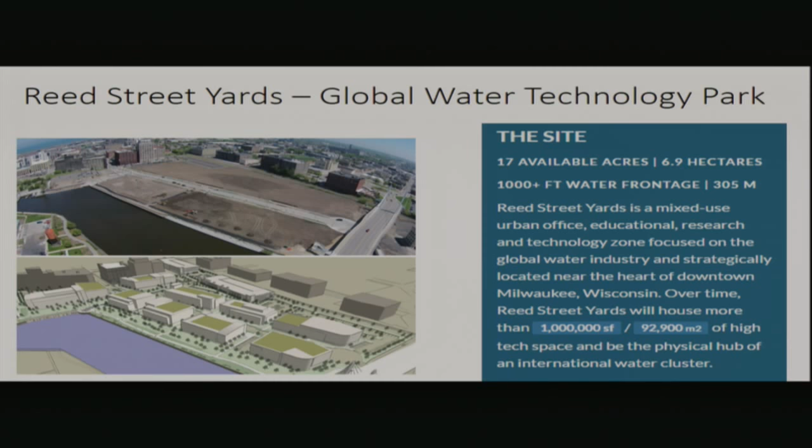Right now, there's Watertronics, which is a startup. They capture water from the canal, they treat it, and they return it back to the river. There's also Zurn, which is a branch of Rexnord. They have a facility there solely dedicated to training their engineers.

So it's very nice for Milwaukee to have all of that right here, right? According to the Water Council, we have about 180 water-related companies in Greater Milwaukee. When people talk about water technology, several things may come to their minds, right? And the Water Council defines water technology as solutions that address water quality and quantity for water users.

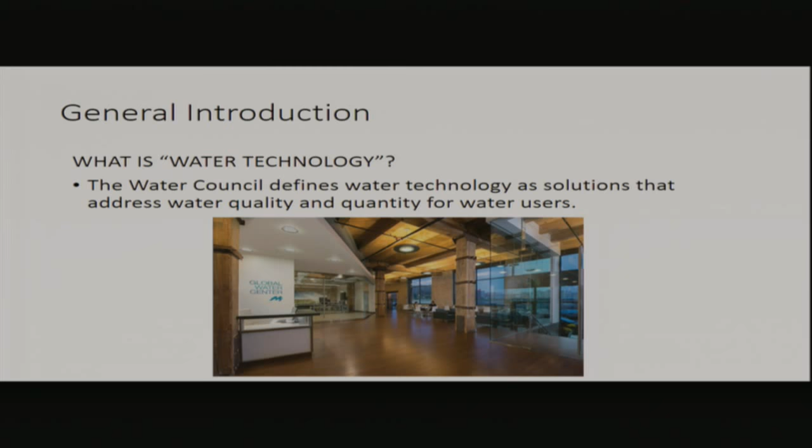Let me tell you a little bit about our facility, the WaTA facility. By the way, it is a shared facility, so it is available to all the schools and departments at the university. So it is available to you. We do have a clean room. It's specifically for microfabrication and for fabrication of certain steps of filtration materials.

It's ISO class 6, so it's an environment that has a limited number of particles per area, right? Researchers wear special garments when working in that room. That's mostly for microfabrication. The microscope room is also available to all the students and faculty in our university, and to our partners as well. So other universities, industry members, this is all available to them as well.

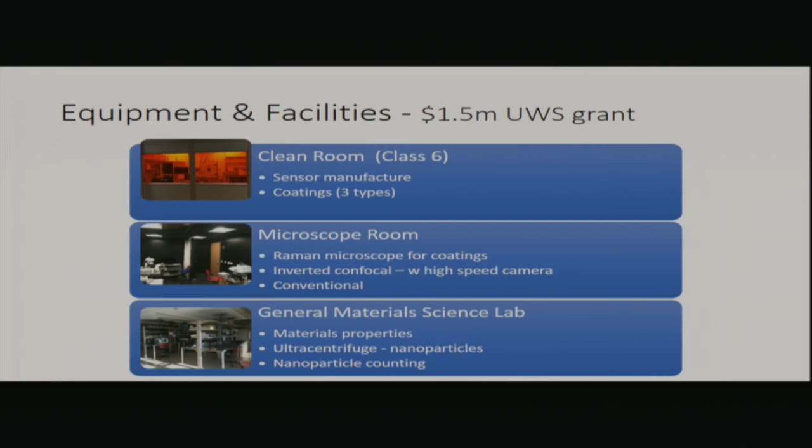In the microscope room, we focus on disinfection technologies. We have a confocal scanning microscope, an upright microscope, and a Raman microscope. And we also have a general material sciences lab with a variety of equipment for evaluation of material properties of our sensors and adsorbents.

We make sure that we can collaborate with all the departments and resources that we have available at the university. We collaborate with the Office of Undergraduate Research, School of Freshwater Sciences, Physics, Shimadzu Center, and also AAF, and Steve is right there. We collaborate a lot with his facility. So that's the beauty of this, really joining efforts and collaborating and bringing things together.

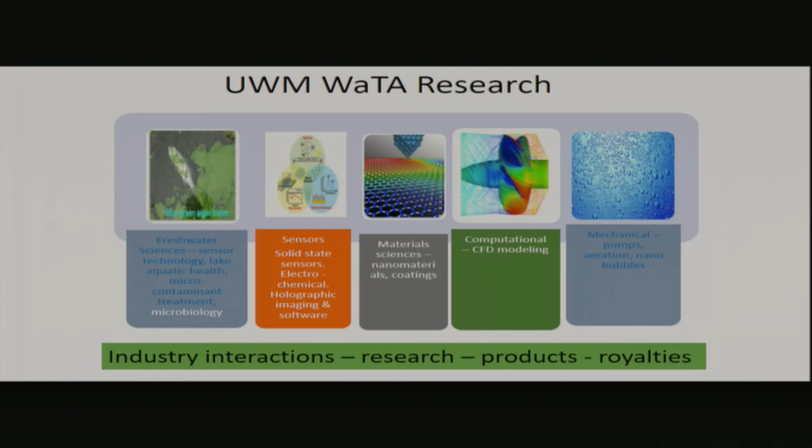I want to tell you a little bit about what my lab is doing right now. My research is mostly focused on development of novel porous materials. Here are some of the students that I have assigned to those projects. I'm also working on a bacteria detector sensor, a sensor for detection of biofilm in pipes, also evaluation of a device for detection of dissolved metals in water, and microbial fuel cells.

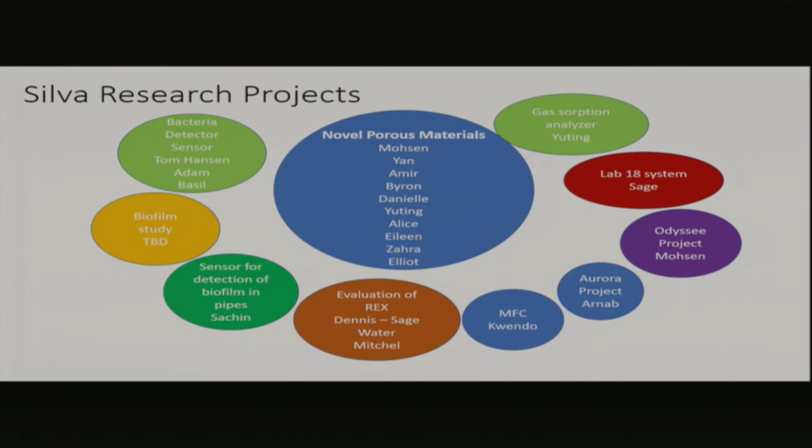I have a project in collaboration with a local hospital in the medical field, and the Odyssee project, which is a French startup, and we are helping them evaluate the ability of their materials to reduce corrosion. I also have specific work in development of techniques for metal oxide deposition, and also for evaluation of micropores, mesopores and macropores in adsorbents. So this is what I'm doing right now.

So every time we are conceiving ideas and developing novel technologies, we think about protection of that IP, which belongs to the university. So some of the work that I will be showing here to you, you may find a little shallow, but that was on purpose. Most of our research is actually being considered by the UWM Research Foundation for patent. So we are not allowed to release information. It is considered public disclosure if we do so.

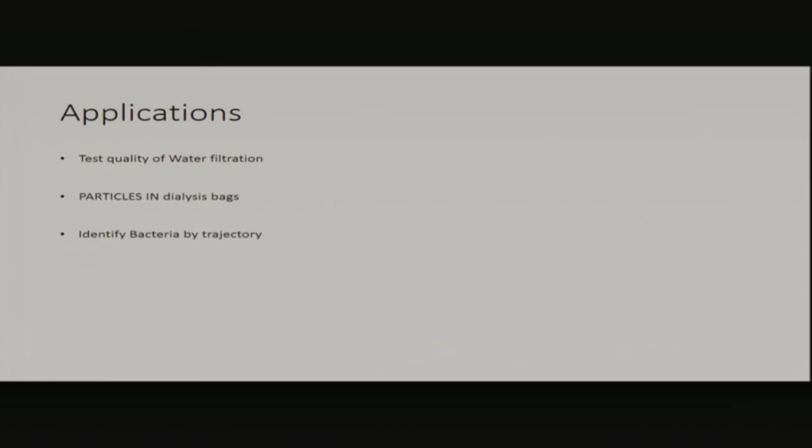Initially, this sensor is for detection of particles, so visualization and quantification of particles, and also for detection of bacteria. So we have some progress in that field. There's still a lot to be done. I will show you some of our progress today.

As a sensor for detection of particles, one of the applications we see is evaluation of quality of dialysis bags. When talking to my collaborators at the Medical College of Wisconsin, what I learned from them is in these applications, they don't care about how much is there. They care about, is there anything there? So it's a yes-no test. If yes, they cannot use the dialysis bag. If no, then of course they can go ahead and use it safely.

So this sensor is an optical sensor. We use what is called holography. There's a tiny volume, I believe we are working with 2 microliters right now, where the images are acquired in layers. The number of layers and their thickness are determined, and we acquire images in 2D, but because they are acquired in multiple layers, they give us 3D information about the number of particles in that field of volume.

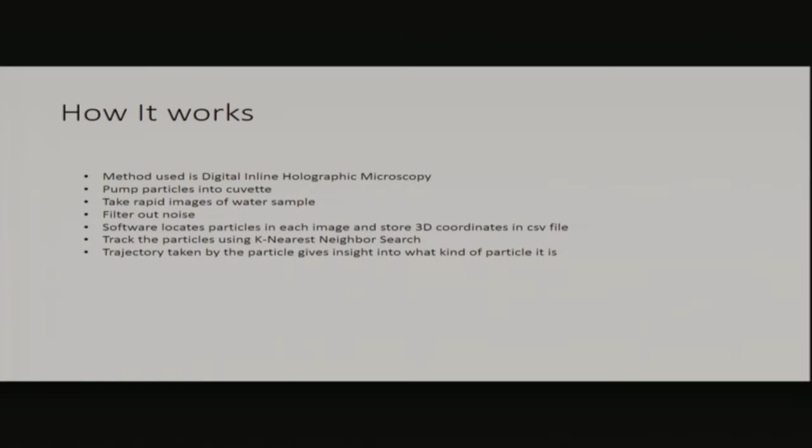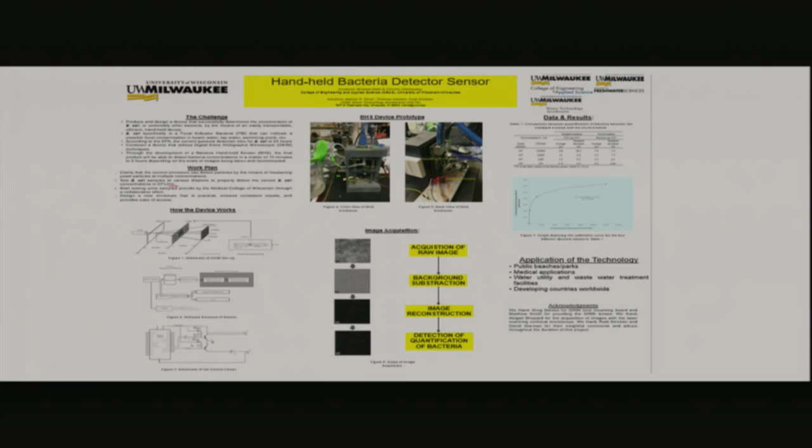In this particular case that the students presented in this poster, they spiked pure water with a known amount of bacteria of a single strain. So in that case, we were able to quantify bacteria under these conditions. Here is one of the images we acquired when we were partnering with a startup called Stonehouse. We had our device integrated with their filtration system.

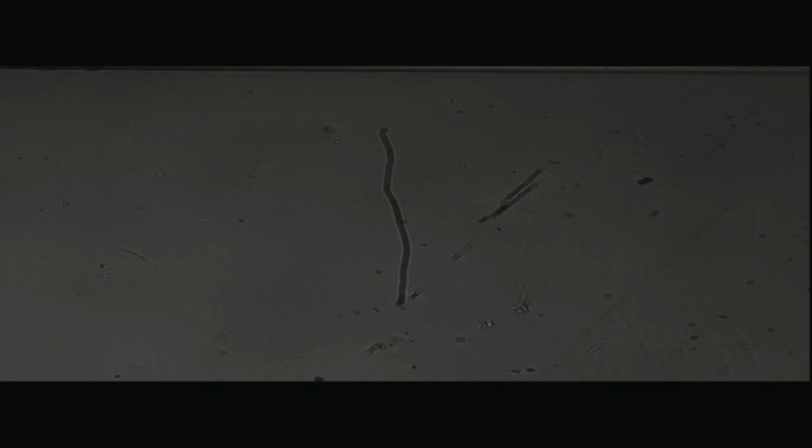I know this image is dark on purpose because that's how we see it when we acquire the images. We extract the noise, and then what remains are just these white dots. Then we have particle tracking software where we can identify the particles and quantify them. I will go with it again so you'll see where they are and how they were identified. This is just to touch base on some of the technology that's out there.

Another one, and this one in particular, we are working on patenting this idea. So for this one, I'll tell you the purpose and show you a little bit of what we know so far, but we don't release information about the technology. So right now, a sensor for detection of biofilm in pipes. Let me just bring everyone together in terms of what biofilm is.

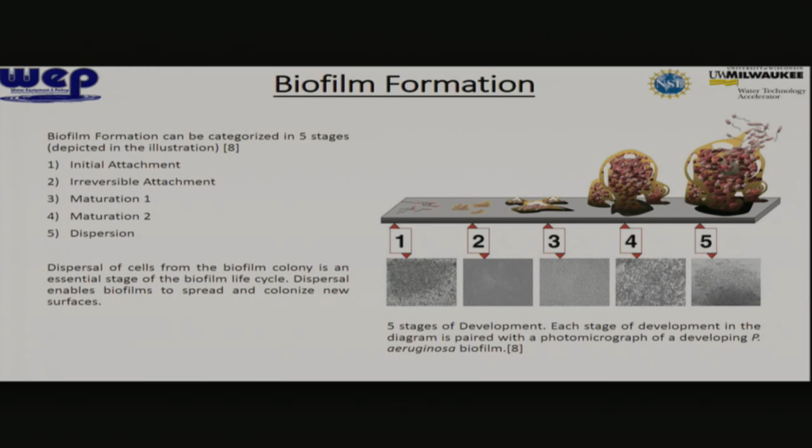So we have a colony of bacteria, and they live in colonization. We have the formation of biofilm. This is a well-known theory. In the initial phase, there's a reversible attachment until it finally reaches irreversible attachment, maturation, and then dispersion, when the biofilm starts to come off. So, why do we care about this? Well, biofilm is well known in all sorts of medicine applications.

Not only the room where the patient is located, right, and the need for reducing the presence of biofilm. And yes, I'm talking about reducing because biofilm will grow on all sorts of surfaces, in all sorts of temperatures and conditions. They may grow less or more, but they will certainly grow, and that is a concern in the medical field.

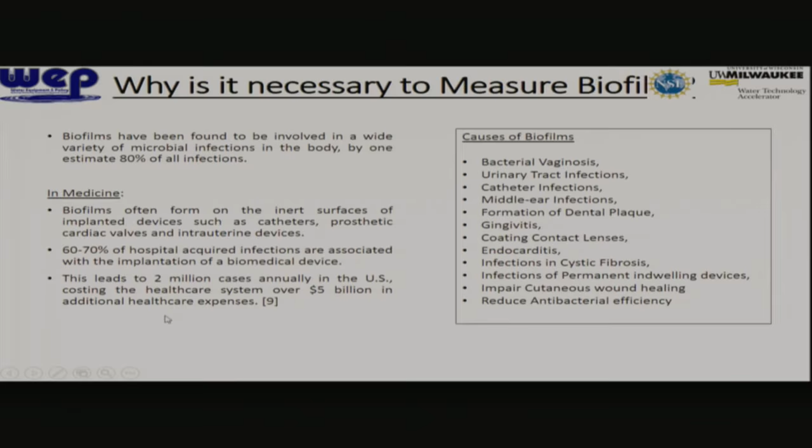For odontology, right, for the bacteria, the biofilm that grows on teeth, or contact lenses, which I actually wear, and that's always a concern for the users, right? So these are just a few of the reasons why we care about biofilm in the medical field. And of course, this leads to 2 million cases annually in the US, costing the healthcare system over $5 billion in additional healthcare expenses. So that by itself is a pretty good reason for us to care about the presence of biofilm and quantification of biofilm.

We also care about the presence of biofilm in the pipes, and not only for food industries, but a variety of other types of industries. We also care about corrosion of the machinery, right? If there is growth of biofilm, biofilm may lead to corrosion as well. So these are just a few of the reasons that the food and beverage industry is definitely one of the industries that most care about this topic.

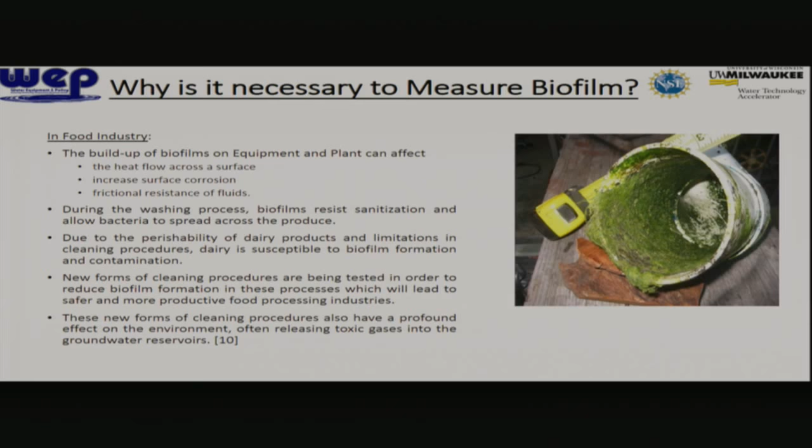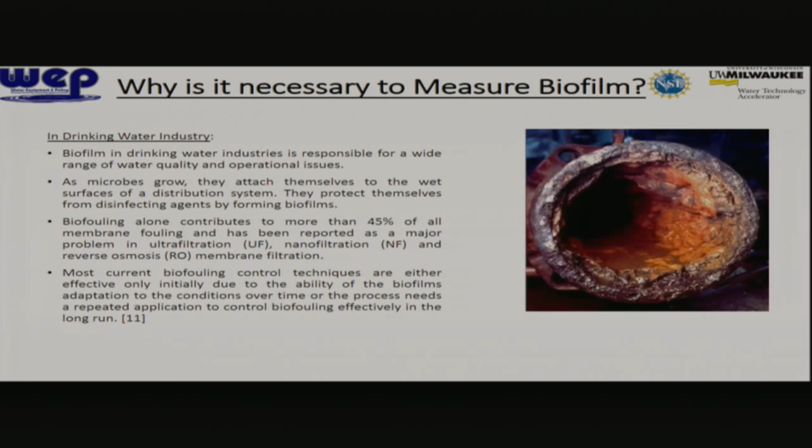And in the drinking water industry, of course. So biofilm formation inside of the pipes: first of all, it is challenging to detect the presence of the biofilm. There are some technologies out there, right? And the second thing is once the diameter is taken by the biofilm, just like the figure we have right there, there's a lot of cost for the transportation of this water, and most importantly, health concerns, because that's the water that you will be receiving in your house. So lots of reasons for all of us to be interested in that.

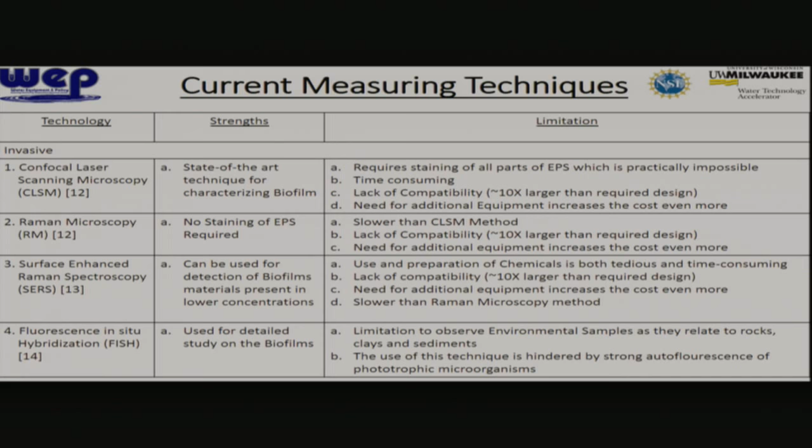Yes, there are techniques out there for quantifying and identifying biofilm. It would be great to have a technology that could identify and quantify the presence of biofilm in pipes if it was a non-invasive technique, right? Right now, coupons are removed from the system so we can quantify the amount of biofilm growing on that surface. How about if we could have a non-invasive way of just scanning your pipe and knowing what is there and how much biofilm is there? So that's what my lab is doing right now, but I cannot tell you more.

I see some of the smiles. Oh, now I want to know what you want to say. Maybe next year when we have the patent cleared, I can come and talk about the details of what we're doing. I'm actually very excited about that project. I have a student from electrical engineering from this school working on that project. I'm very proud of him. He's doing great work on that project.

Now, switching a little bit to the adsorbents. Let's talk about porous material for removal of pollutants from water. It's a technology platform. The way we do it is we work with natural material. We functionalize those materials with either nanotechnology or biotechnology, making that material specific for removal of certain pollutants from water. One of them is a technology for removal of phosphorus.

We filed a patent in August of last year, so we are still waiting; it takes about 18 months for the patent to be cleared. As soon as it's cleared, that's when we send manuscripts out. Otherwise, if you publish a manuscript before you have a patent, then you don't have a patent because it becomes public knowledge. So we hold the manuscripts until we get the patents out. I want to tell you a little bit about this. This is a very exciting project. This is a Great Lakes Protection Fund project that I have in my lab. This is a 3-year project. I have a graduate student, a Ph.D.

Student from industrial engineering working on this project. And also I have 3 to 4 undergraduate students working on this project. One is from industrial engineering, and I think I have 2 from environmental and 1 from conservation science supporting the graduate student on this project.

So the goal of this project, first of all, this is in collaboration with multiple parties. We collaborate with an engineering company based in Michigan, and they are responsible for helping us deploy this technology in the field. This technology will be deployed in 1 farm in Wisconsin, 1 farm in Michigan, and if time allows, another one in Ohio. So the idea is that the farms have a lot of presence of phosphorus, right?

So switching gears to the adsorbent for removal of persistent organic pollutants. It's very exciting to me to be working with persistent organic pollutants. The challenge here is that most persistent organic pollutants either don't have any sort of policy or enforcement from EPA, or they have it as a recommendation. It's not enforced. Why is that? For example, metformin is the active ingredient of medication for diabetic people, right?

So when you take your medication at home, you ingest that medication, but it is discharged and goes back to the waterways through urine. Okay, now we have to treat it, right? It turns out that one of our researchers at the School of Freshwater Sciences, Dr. Rebecca Klaper, did a study where she collected samples in different steps of the drinking water treatment plant and wastewater treatment plant. This was already published probably 3 or 4 years ago, so this is well known in the literature.

So it turns out that she was able to show that metformin is one of the pharmaceuticals that is not removed from any of the unit operations in the treatment process, right? So what does that mean to us? When I go to the sink and I grab a cup of water, what does that mean to me? What does that mean to our children? We don't know. However, as a toxicologist, she did laboratory work and she published.

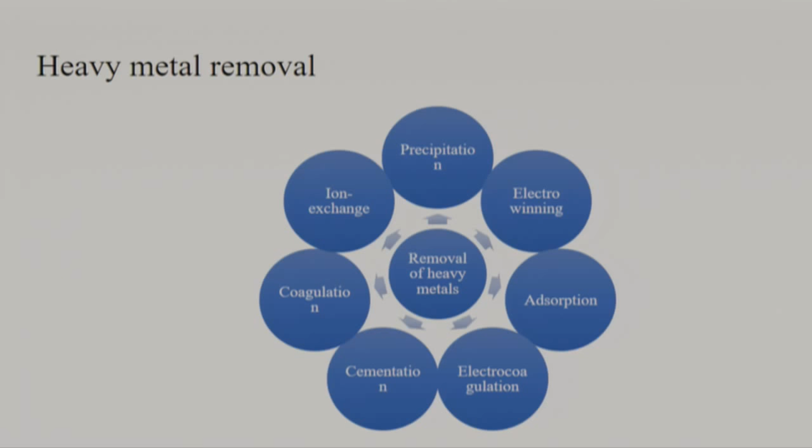I'm going through a few slides and just jumping a little bit. There are many technologies or developments out there, right? It's not only adsorbents. There are other technologies that can potentially be explored and used for the removal of heavy metals. In the particular case of my student, he mostly focused on ion exchange and adsorption. There are other mechanisms.

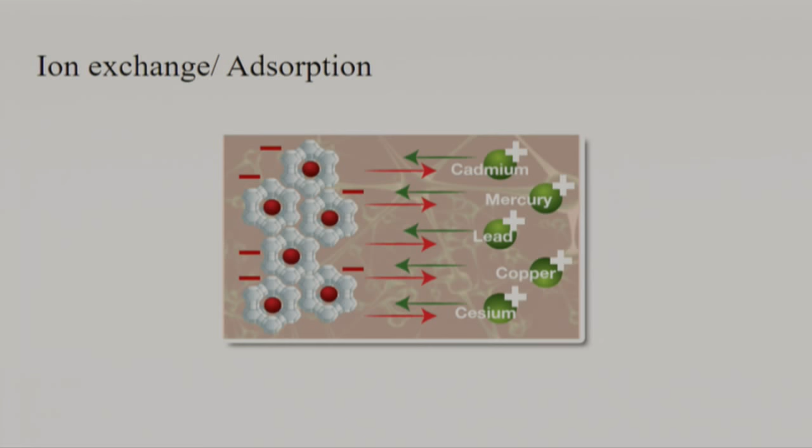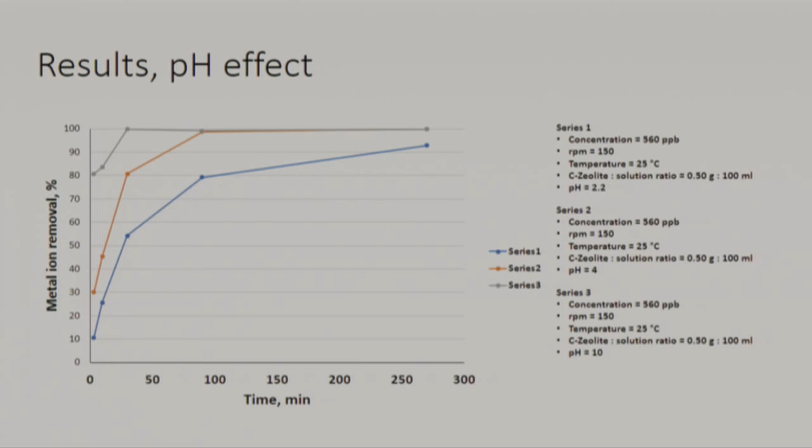So he also tested the behavior of this adsorbent when exposed to different pHs, right? We do care about that. Depending on the incoming water, the performance of the material may change. He also tested temperature. From his study, I believe he tested from 4 to 50 degrees Celsius. He didn't see much impact within that range of temperature.

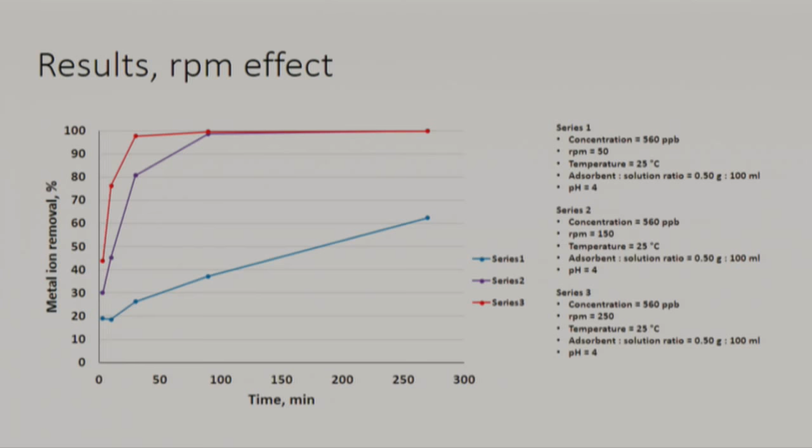And he also tested the RPM. So what we were looking at here is more the impact of the laminar flow or turbulent flow of this water when passing through the adsorbent. So he did explore that in terms of efficiency of the filter.

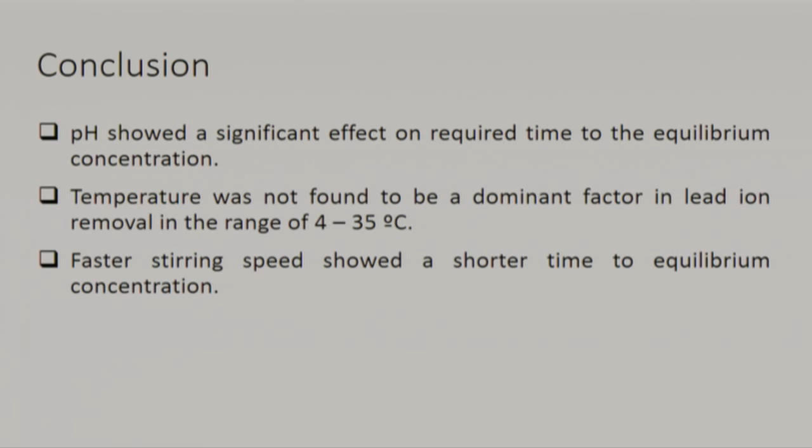So this is just a little bit to touch base on some of the technologies that my lab has been developing. We have also been working with adsorbents for removal of ammonia from water, Legionella from water. There was a company based in Illinois. They work with healthcare, and they came to us and said, hey, I know you are working on an adsorbent for removal of E. coli, which for me was just a model organism. And they said, could you be interested in working with an adsorbent for removal of specifically Legionella, right? So we started working on that.

And my student, actually, the engineering poster competition is coming very soon, and she is getting ready to gather her data and be presenting. I believe the competition is going to be in April. So this is very exciting to me.